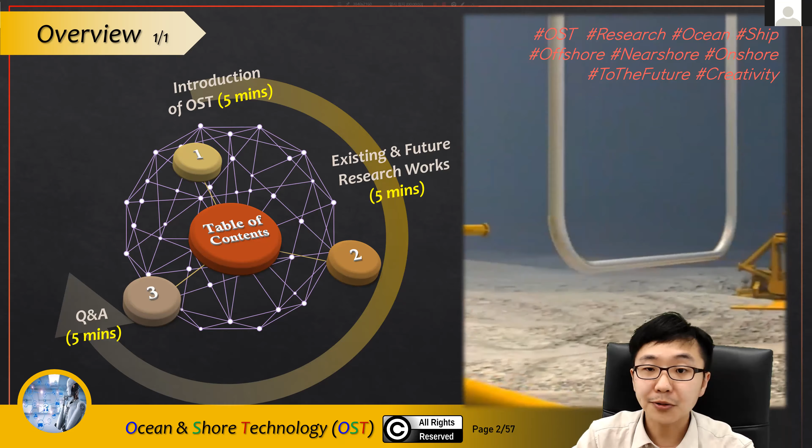We have prepared a variety of specific and realistic problems and programs to provide practical value for future talented researchers like you. We provide researchers with an excellent environment, network of people, and services and opportunities to help produce future leaders.

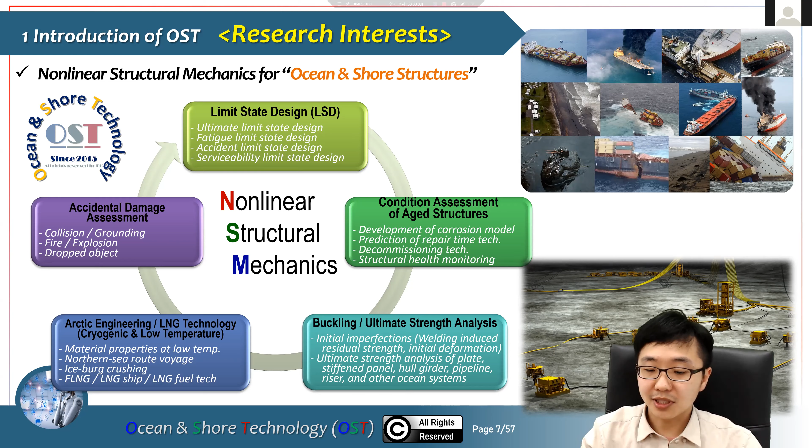And accidental damage assessment. This is our human body analogy — all the photos in this slide were captured by KOSORI, and human bodies and our structures are quite similar. When we construct a vessel, that's like the as-built condition of a newborn baby.

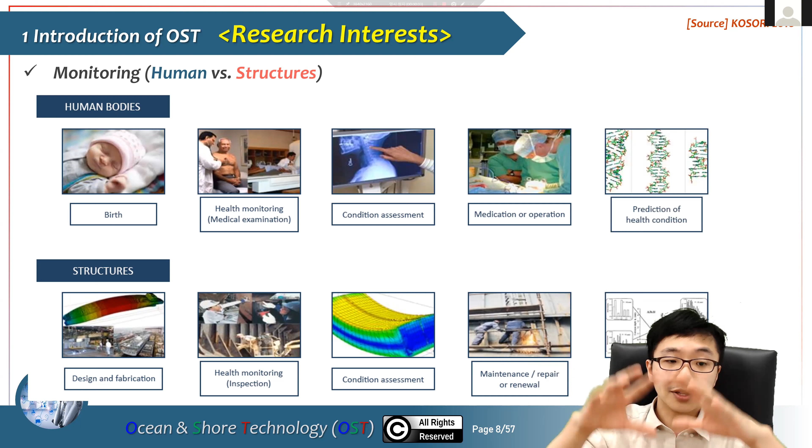As time goes by, we need some kind of inspection, like X-rays or similar methods. Once we detect that something has gone wrong, we need to take action — after condition assessment comes medication, operation, maintenance, or repair. So what we are doing is summarized here.

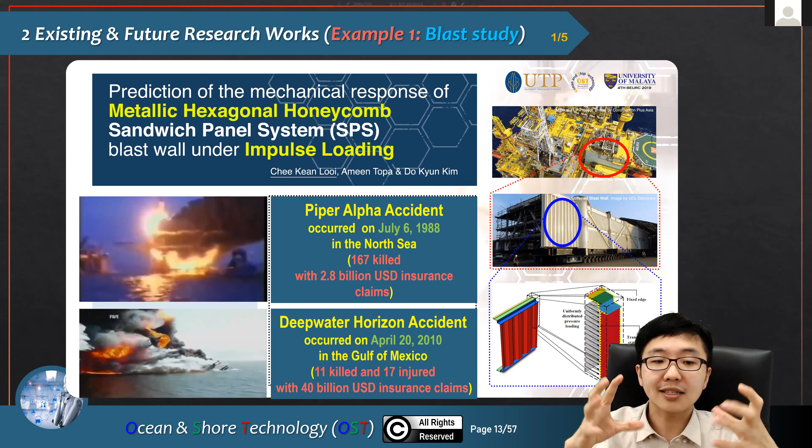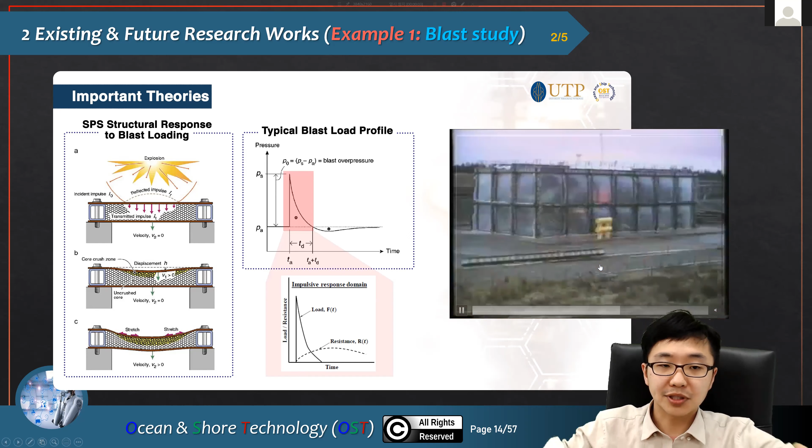So this is the FEM modeling, and after that this is the actual testing. You can see a huge amount of blast load applied to the structures. So how are we going to protect our structure? One way is to install a blast wall.

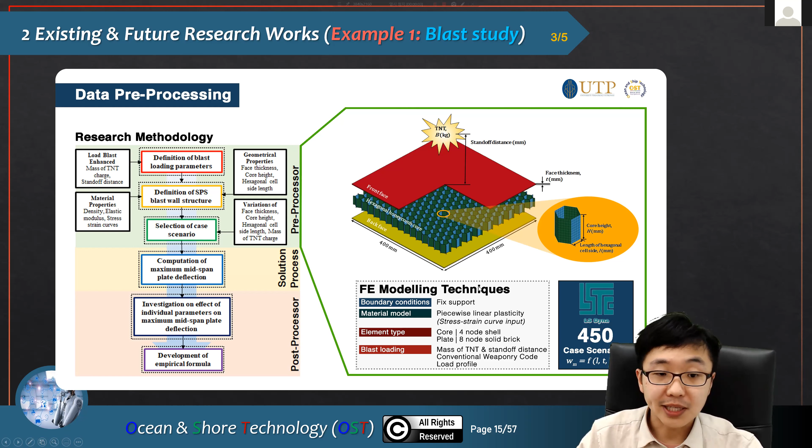We try to model the sandwich panel system, which we call SPS, with a hexagonal core shape. We do some data processing, and we modeled 450 finite element models. After that, here are some examples.

We did data processing and were able to provide design formulations.

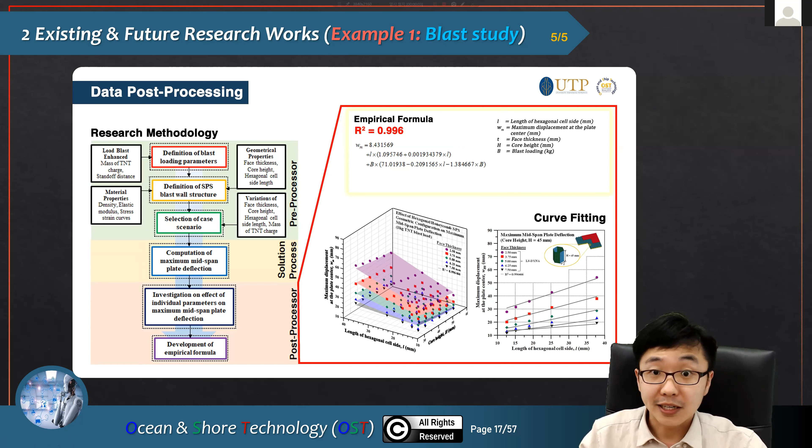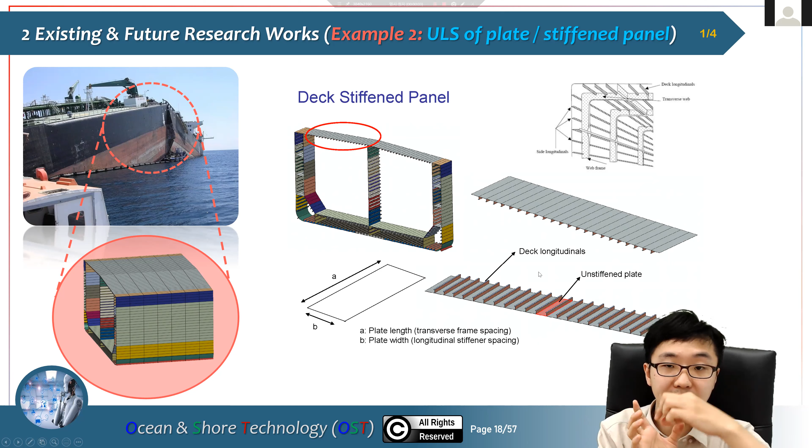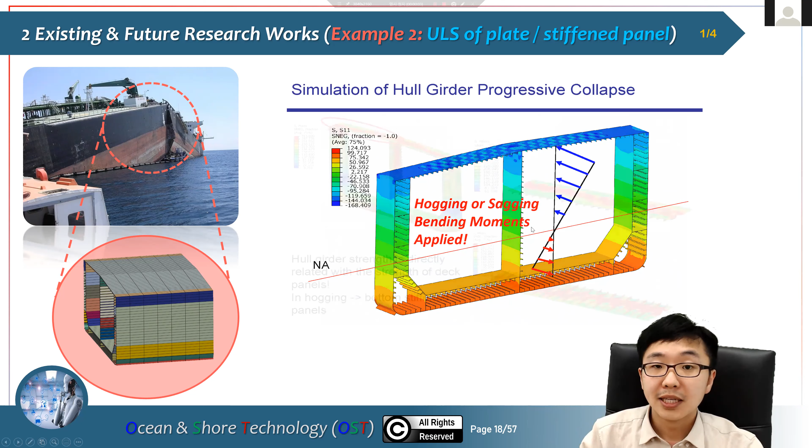Here, this vessel is broken into two. This can also be modeled by the FEM. It should be subjected to the vertical bending moment, with the backside compressed or tensioned continuously. This deck is a combination of plate and stiffeners. This is the finite element analysis result after we apply the progressive collapse load, showing the buckle or ultimate limit state.

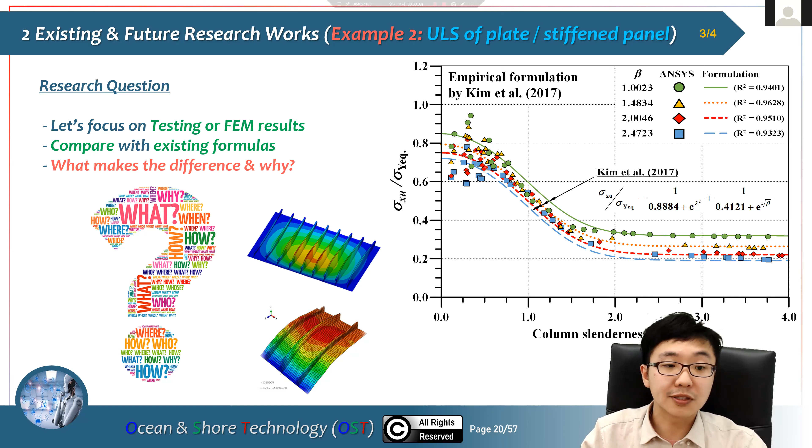But here, the important thing is not the what or the how, but the most important thing is the why. Why do we need to do this? We want to provide easy and clear design formulations, design solutions for our customers. So here is the outcome.

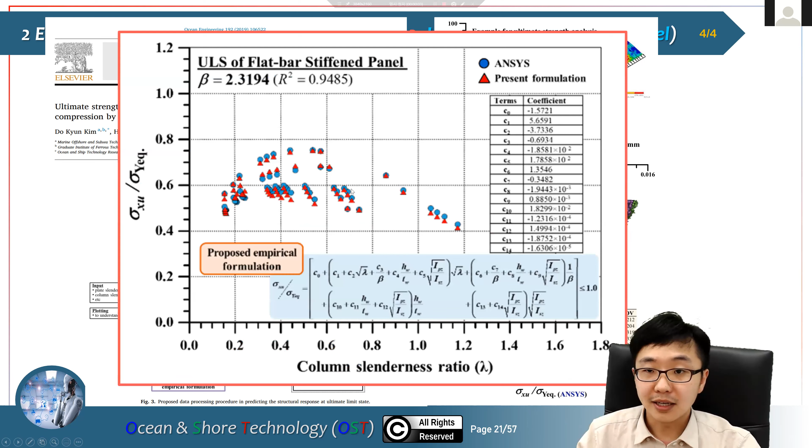We developed our own data processing techniques. We compared results, and you can see the accuracy here. This is the example, and the last one is the application of artificial neural networks to riser structures, shown top right.

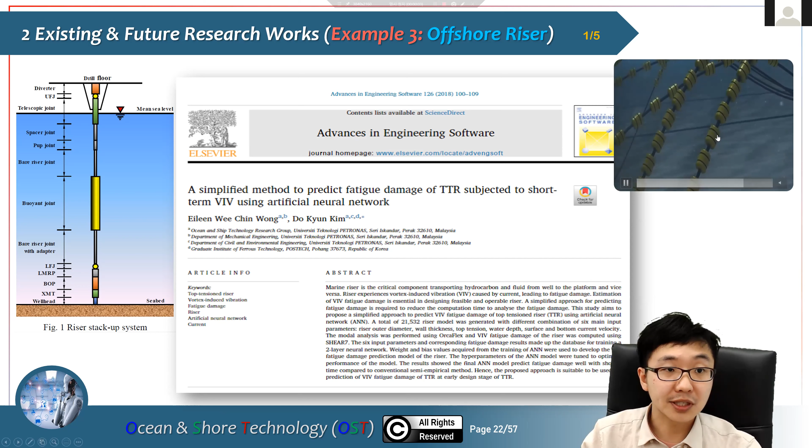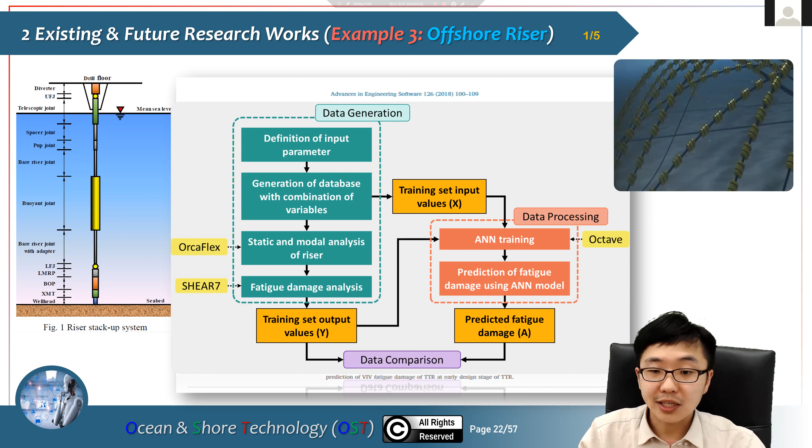This is the data processing technique and procedure. I can't explain all the details within this time frame, but data generation and training is important, and data processing by Octave or Python, whatever it is, we can do that. After that, we need to compare those two sets.

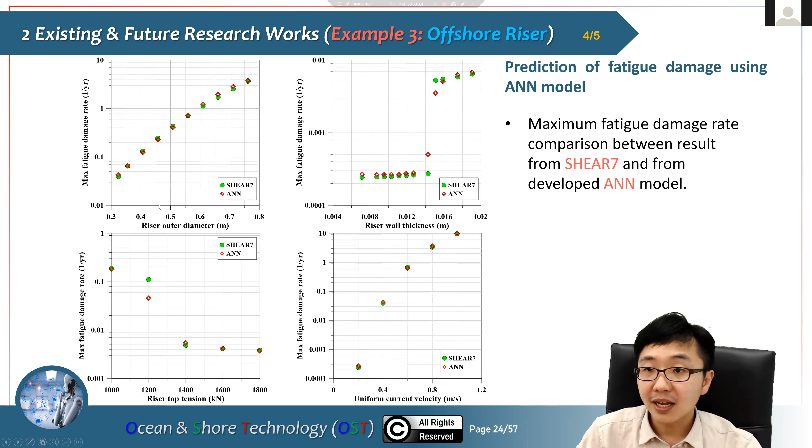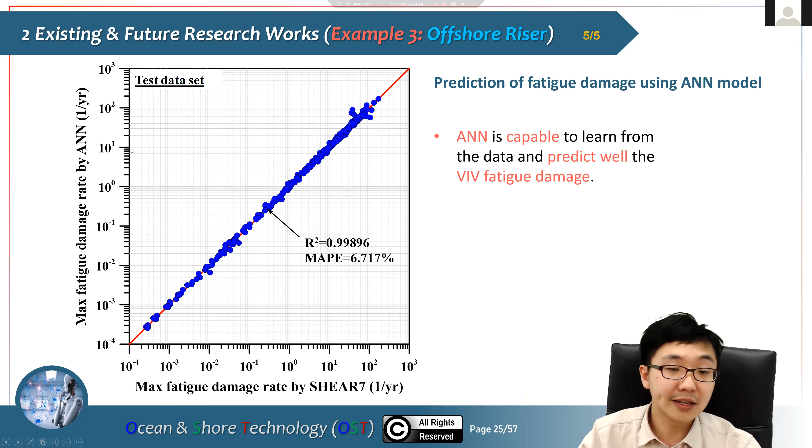So this is a simple ANN training example for the riser structures, and we compare the outcomes. It was not that bad, and we tried to put more input, like 20,000 cases of riser structures. You can see here the software result and our ANN result is not bad, isn't it?